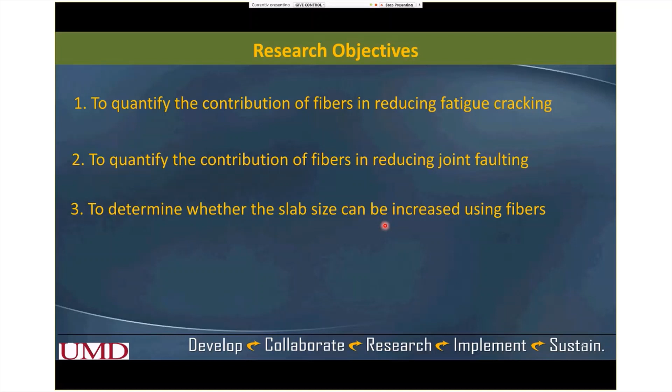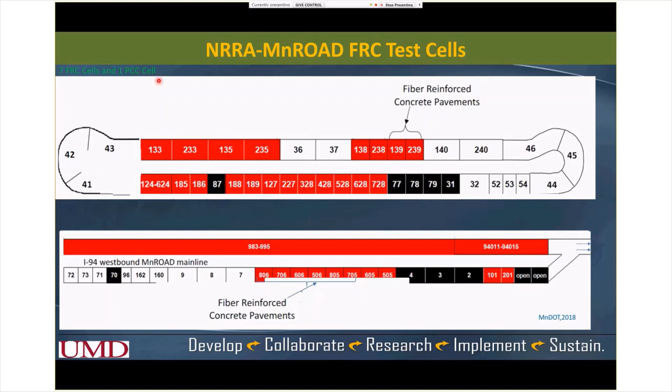These slides show the cell description. Out of the 8 cells, the first 6 cells are concrete pavement on gravel. Cells 506, 606, 706 and 806 were constructed on a relatively good, strong aggregate base layer, with slab sizes of 6 feet by 6 feet. We wanted to construct 5-inch thick cells, but cell 606 was unintentionally constructed with 6-inch concrete.

Cells 139 and 239 were ultra thin pavement, 3-inch and 4-inch thickness with 6 feet by 6 feet slabs. Cells 705 and 805 are thin unbonded overlays, 5-inch thick, and these two cells were constructed to see if we can increase slab size using fibers. Cell 705 has larger slab size - in the driving lane they were 14 feet by 12 feet, in the passing lane 12 feet by 12 feet and 13 feet by 12 feet. Cell 805 had similar length but the slabs were narrower, 6 to 8 feet.

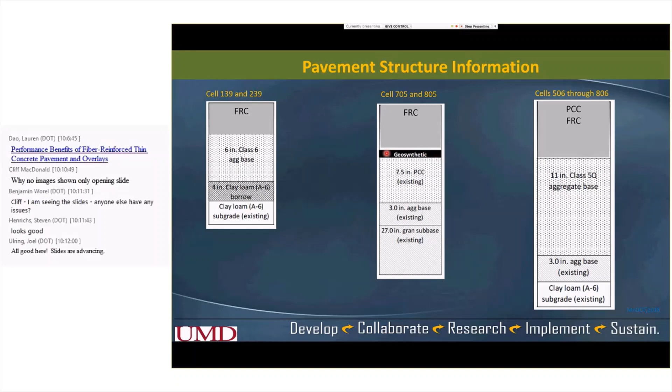This is the pavement structure information. Cells 139 and 239 were constructed on a slightly weaker base, using 6-inch class 6 aggregate base. Cells 705 and 805 were unbonded overlays, meaning a geosynthetic layer was used as a bond breaker. Below that there was 7.5-inch concrete on aggregate base. For cells 506 through 806 we varied the fiber doses - cell 506 was plain concrete and the others were fiber reinforced concrete. Those cells were constructed on a relatively thick or strong aggregate base with MnROAD class 5Q aggregate base.

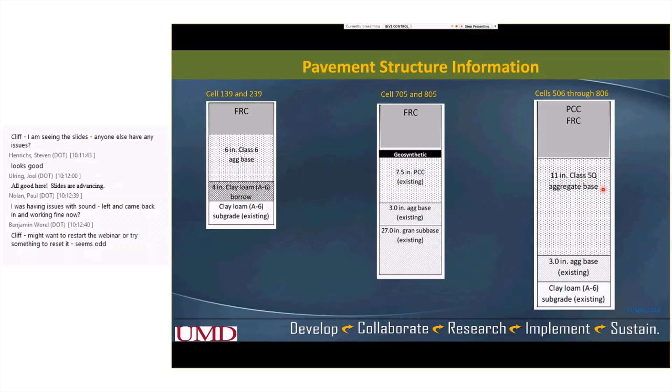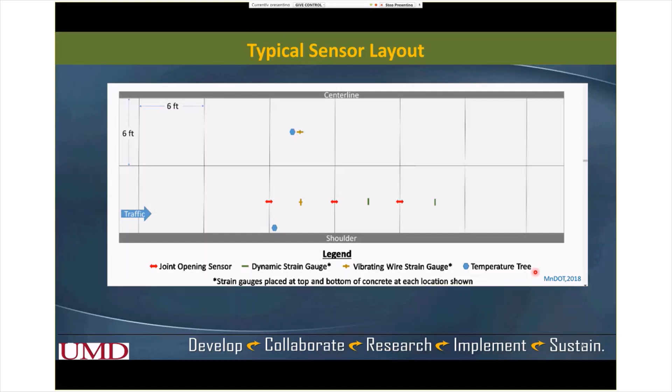Now with this information I will move to the distress data we have so far. First, fatigue cracking. The pavements were constructed in 2017 summer and fall. A distress survey was conducted in spring 2018, and in 2019 distress surveys were conducted in spring and in fall or early winter. For cells 139 and 239, by December the ESALs were around 114,000 for 139 and 85,000 for 239. The difference is because of their thickness. The other cells were having around 2.4 million ESALs by 2019, and now it should be more.

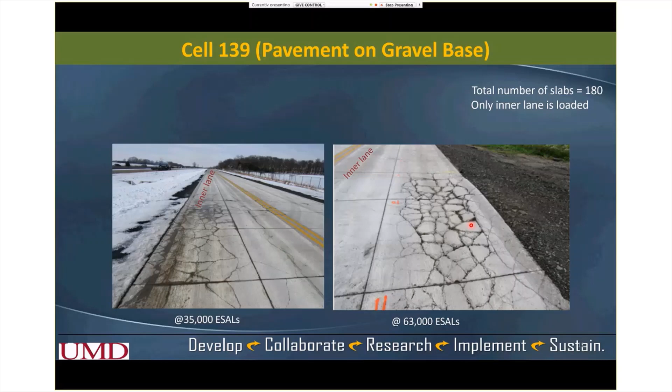So in September 2018, those slabs which were broken or shattered were replaced, 14 slabs. Then when the distress survey was conducted in December 2019, after 114,000 ESALs, it was found that more than 75% of the slabs in these cells are cracked.

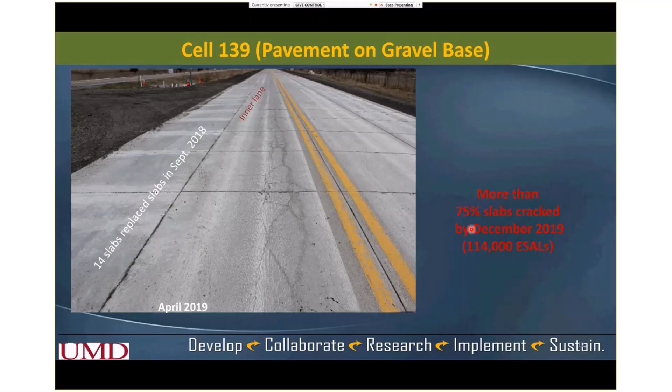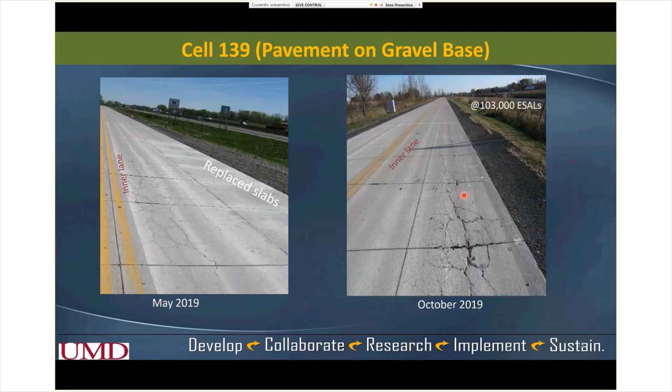Cell 239 had 176 slabs. Cell 139 has 180 slabs. Cell 239 was 4-inch thick and performed significantly better than cell 139, which was only 3-inch thick. These are some pictures where we saw corner cracks and some longitudinal cracks.

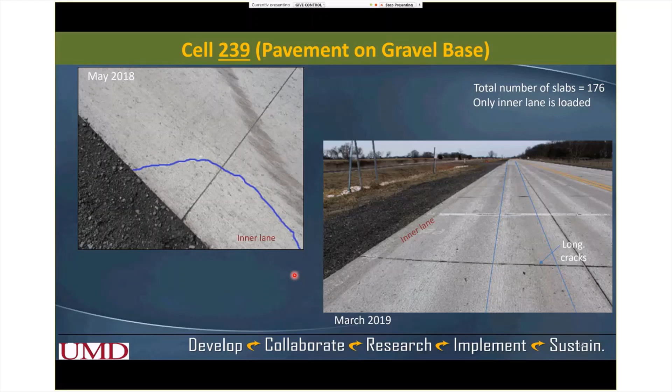These are two pictures, one taken in April 2019, another in October 2019. You can see some longitudinal cracks now, and from the district survey we found that 18% of the slabs have cracked.

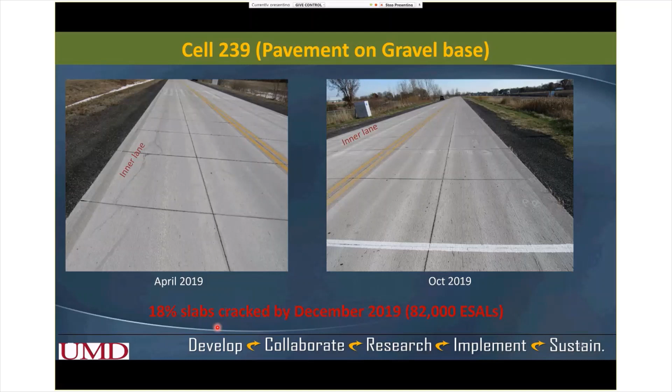Cell 506, which was the only cell that didn't have fiber, had around 96 slabs, all 6 feet by 6 feet. We saw only one crack in 2018, but we've seen some spalling on the transverse joints, as many as 15 locations found to have spalling like this.

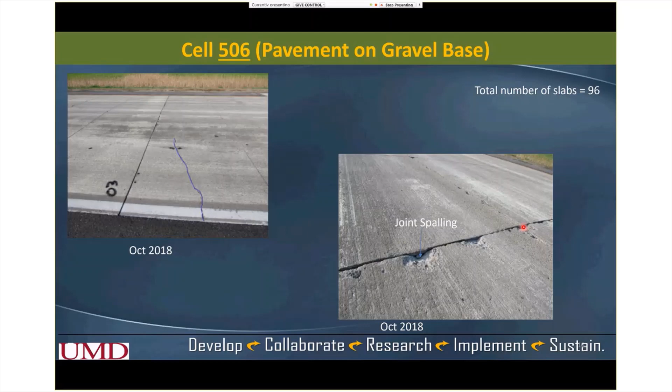By October 2019, there are a couple more cracks formed. Until the last survey was conducted, the data I have shows there are 3 cracks in this cell, no other cracks.

So 2% of slabs cracked by October 2019 after 2.4 million ESALs, which is great, because these 5-inch thick slabs were actually constructed for low volume roads, and only 2% cracked after 2.4 million ESALs, which is really great. But we'll have to keep in mind the base layer is really strong, 11 inches of aggregate base.

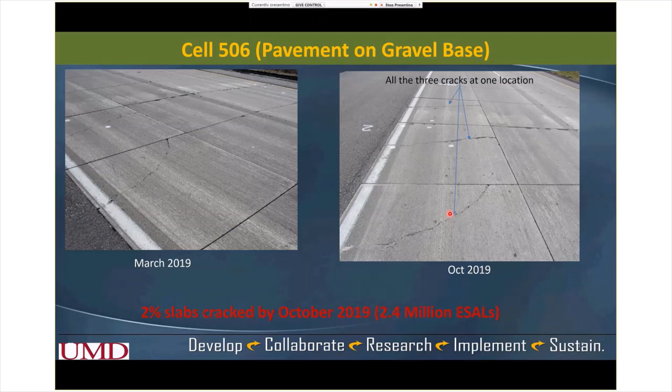Cell 606 only had one corner crack, but this corner crack is on the very first joint, which is kind of a transition here, marking the beginning of cell 606. So this crack probably is construction related. Tom and I also suggested this may not be a typical fatigue-related corner crack on the 6 feet by 6 feet panels of concrete pavement.

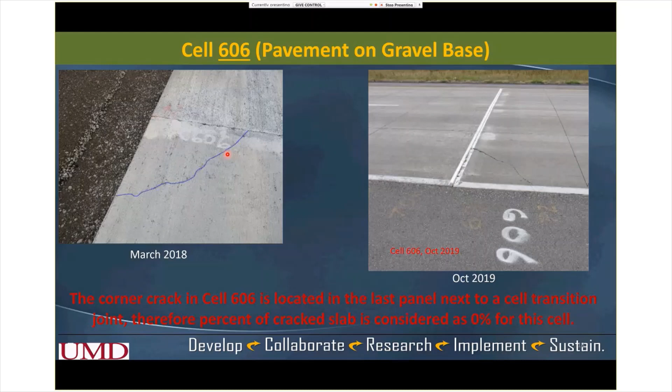So basically we do not have any crack, you can say, in 606. Cells 706 and 806 actually did not show any fatigue crack yet. In cell 806 we saw this kind of tiny little crack, but that propagated off from the joint opening sensor location, so these two cracks are also not fatigue related.

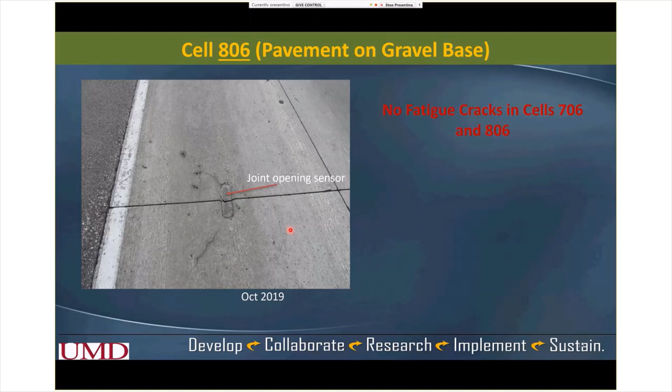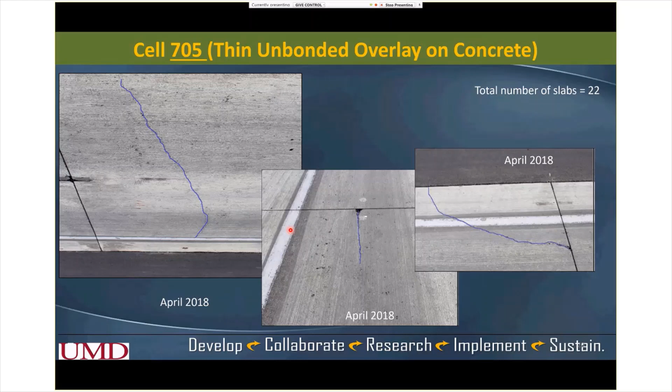Cells 705 and 805 are a thin concrete overlay, unbonded overlay. As I mentioned before, we varied the slab size, basically the width, while the length of the slab was 12 feet. In 705 we had wider slabs, like 12 feet, 13 feet. So we saw transverse cracks, longitudinal cracks, corner cracks, and those cracks, in number and length, continued increasing throughout its life.

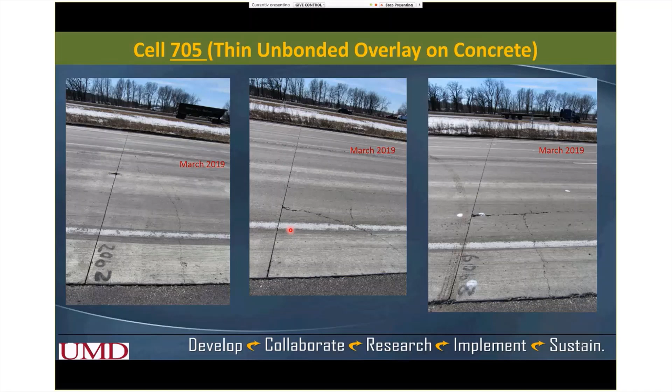So by the end of 2019, 55% of slabs cracked. In terms of fatigue crack, we probably crossed the design life. We're considering 20% slab crack as the end of life, and if we consider that, then we probably crossed it.

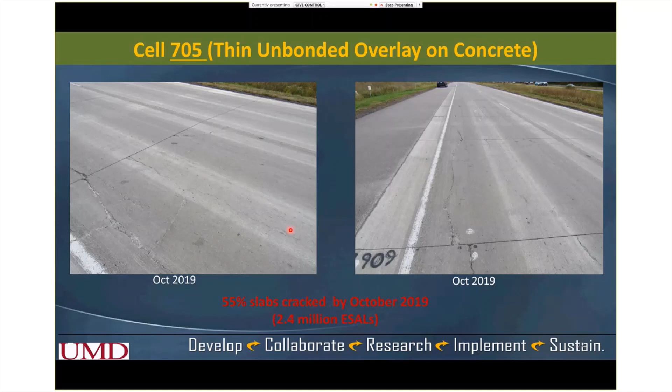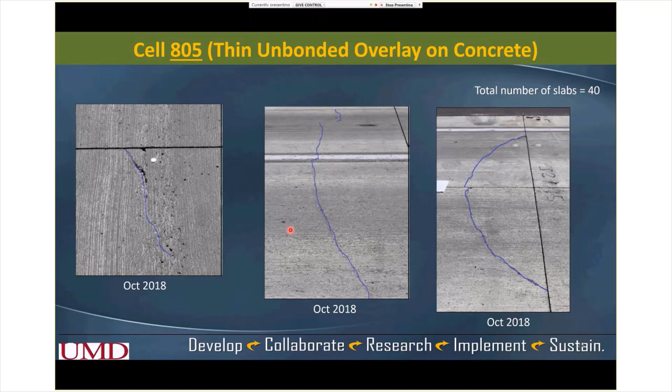Cell 805, which had narrower slabs, also showed transverse, longitudinal, and corner cracks, and those also increased, but these slabs did not crack as much as cell 705 had. So 28% of slabs cracked by October 2019 at 2.4 million ESALs.

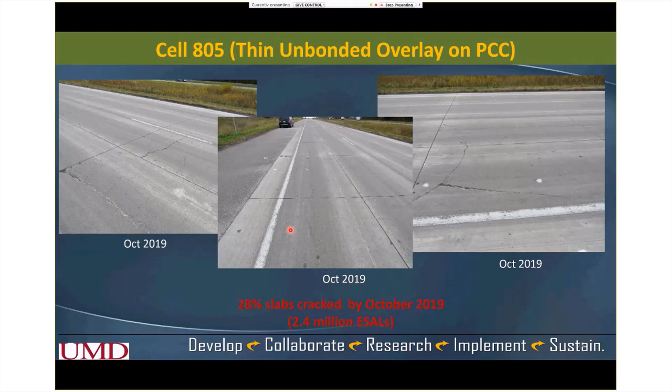Now this slide shows a comparison of the fatigue cracks and spalling. We can see cell 239, which was 4-inch thick with a little weak base, showed the maximum number of cracks.

We did not include cell 139 in this comparison, because 139 showed a different kind of failure, like slab shattering, and counting cracks in that cell was difficult. As we know, 75% of the slabs in that cell cracked, so we did not consider cell 139 in this comparison.

Now the comparison between 705 and 805 shows that 705, which had wider slabs, had more longitudinal cracks, and 805, which had narrower slabs, had more transverse cracks. But cell 705 had 55%, and cell 805 had 28% slab cracked by October 2019.

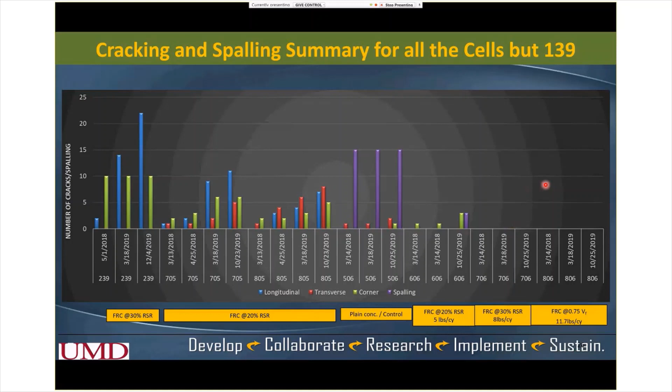This slide shows the percent slab crack versus ESALs for all 8 cells. If we consider 20% slab crack as the design life or fatigue failure criteria, cell 239 is pretty close, and the concrete overlays to unbonded overlays already crossed it, while 4 others constructed on thicker base are still performing good in terms of crack.

Here are some numbers I came up with: 4-inch thick with 8 pound per cubic yard fiber, but on a weak base, took about 100,000 ESALs to reach 20% slab crack. Then the 2 overlays: the wider slab reached 20% slab crack at 400,000 ESALs.

The narrower one reached it at 600,000 ESALs. So probably this particular research did not clearly show that we can increase the slab size. The slab size variation was 7 feet versus 12 or 13 feet width. This research says maybe we cannot double the width of the slabs using fibers. Maybe by 1, 2, or 3 feet, which may not be a big deal or may not be possible in construction. So we probably cannot double the size of the slab using fiber. That is probably what we are seeing from the results of the thin unbonded concrete overlay.

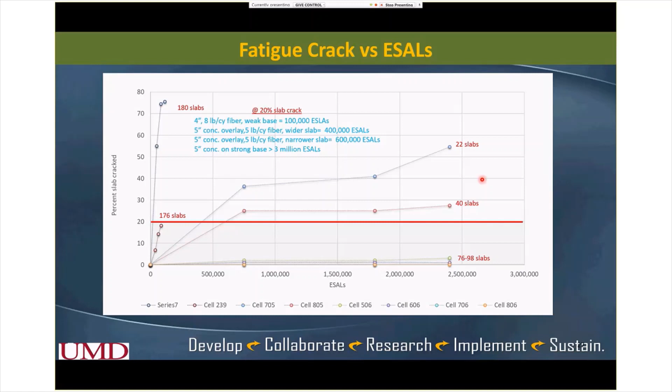Now, joint performance. Joint performance was studied. We took FWD data. FWD tests were periodically conducted, and faulting was also measured.

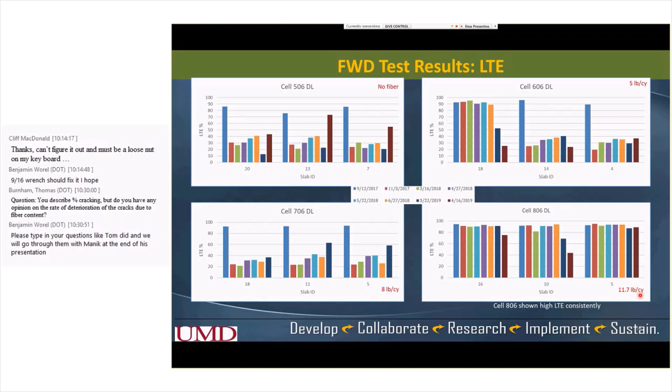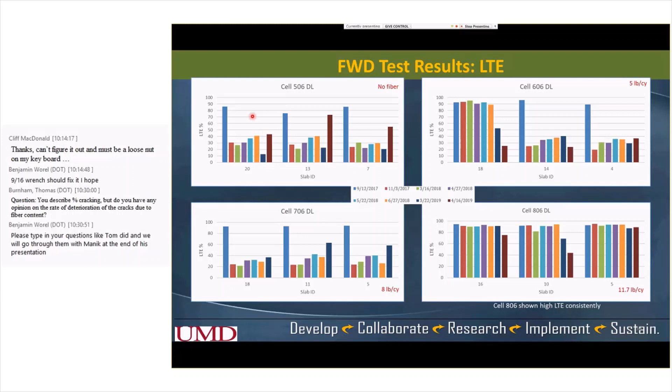Keep this in mind as we look at the faulting in these two cells. For cells 506 through 806, where we varied the fibers from 506 with no fiber to 806 with the highest fiber dose, you can see 506, 606 and 706 had load transfer values that decreased right away after construction. Right after construction we got more, but in subsequent measurements over 7 other dates, we didn't get a very high or even considerable amount of load transfer, well below the 60% or 70% we need.

Now 806, which had 11.7 pounds per cubic yard of fiber, the load transfer efficiency has remained continuously high. That means in these cells, fiber is really helping to keep the load transfer efficiency high.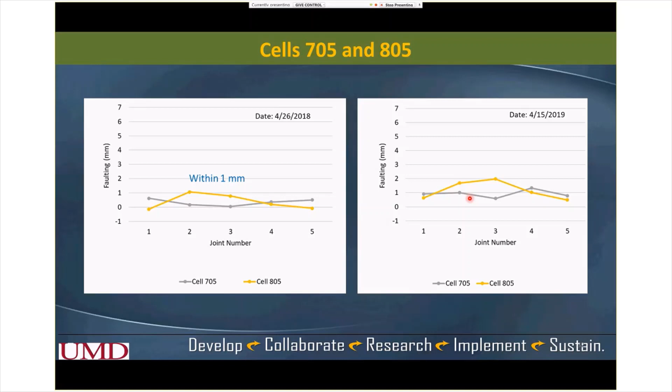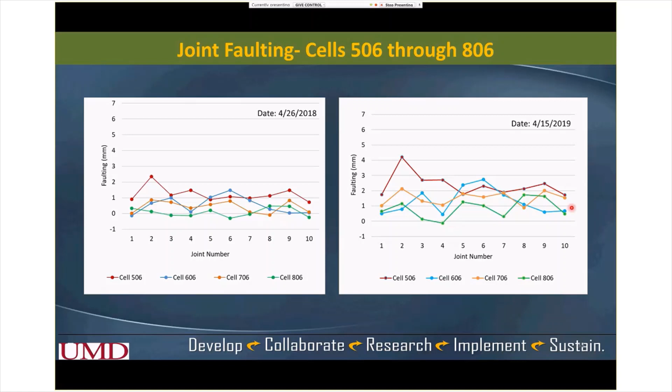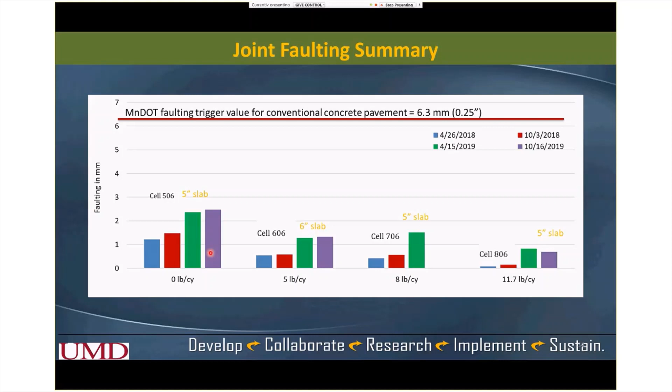Joint faulting for cells 506 through 806. Here we see a clear picture of how fiber is contributing. Let's look at the data we have for April 2019. You can see the plain concrete, shown in red, has a higher amount of faulting, and the green one, 806, which had the highest amount of fiber, had less faulting. We put all those average faulting results together in this plot, and as the fiber is increased, faulting is decreasing. Also the faulting quantity is increasing. The next graph will show us when faulting increases more.

Now this graph compares faulting versus ESALs. These two graphs here are basically for our cell 139 and 239 on the low volume road track, and these are the 4 cells, 506 through 806. We did not include the overlay because that's a completely different thing.

In this one, you can see the faulting measured during the spring was significantly higher. This was spring 2019, and this was spring 2018. We're seeing a good jump during the spring, possibly because of a weak base during that time, but this is the data. Compared to spring and fall, we see marginal increase and sometimes no increase at all. This data here is showing almost the same below. Actually, these particular faulting results were lower than this.

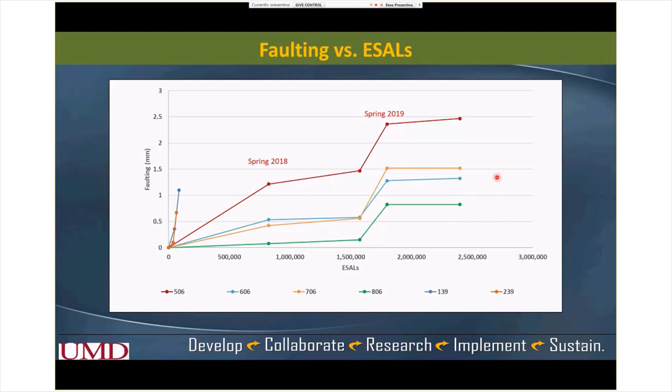So now in one of our tasks, we are using all the faulting results to develop faulting prediction models. We're also doing the same for fatigue cracking, but because the fatigue cracking data for 506 through 806 did not show any good cracks, we're still struggling with that due to lack of crack data for those cells where we varied the fiber.

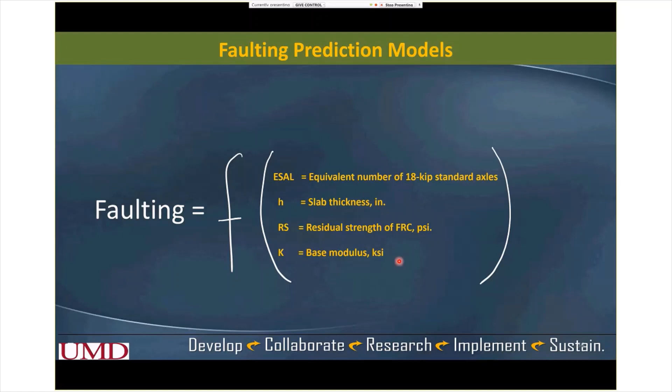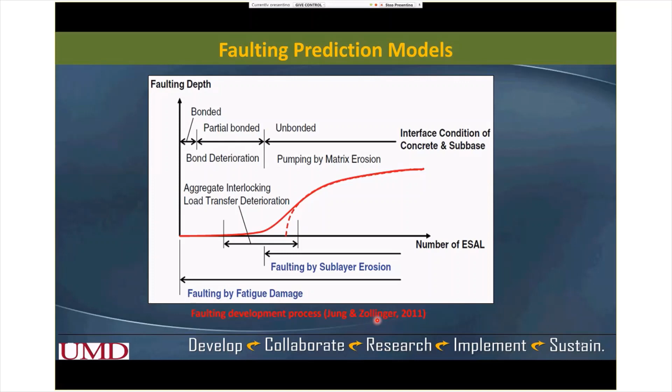But we analyzed the faulting data and tried to create some models. Here we try to relate the measured faulting with respect to ESALs, slab thickness, residual strength, and base modulus. The base modulus we didn't have test data for, but we found other research conducted on MnROAD where they reported resilient modulus or other parameters. So we used those to get K, and we also got K with respect to different seasons. This is a kind of typical faulting model, not exactly for concrete overlay or thin concrete pavement on gravel base, but for conventional concrete pavements. This model is by Dr. Zollinger and his group. As you can see, initially the faulting remains low, and then when layers get unbonded, pumping or erosion takes place, and the faulting starts increasing. So we tried to analyze our data in that kind of pattern.

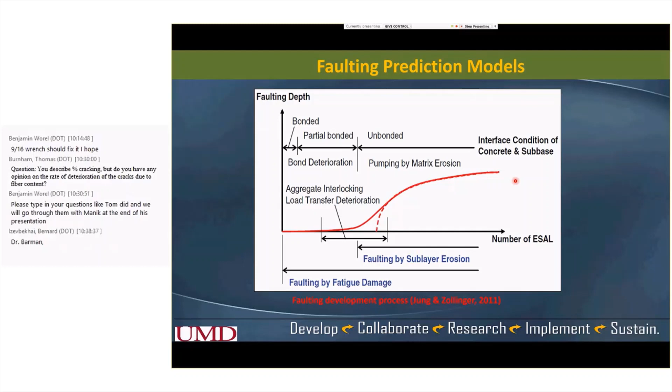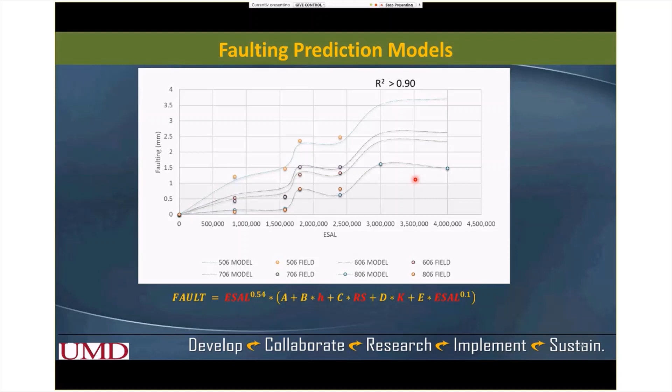As I mentioned, we collected a lot of sensor data. We had a lot of sensors installed, and then we collected all that data. In these presentations I'm not going to cover it extensively, since we are still doing a lot of analysis on this data. So these few slides just show basically key findings.

We collected temperature data at different depths of the pavement, and we collected data throughout the season. These two graphs on the left show how temperature varies with respect to the season, and then we calculated the temperature gradient. As an example, the temperature gradient at three times, which we calculated here - X, Y, and Z - are basically three times: high temperature, low temperature, and intermediate temperature.

In all three times, what we observed is that because the thickness of the slabs here is 3 to 5 or 6 inches, not like 12 inches, the gradient is relatively linear. You can see the gradient is relatively linear. For one particular slab, I'm not sure why, cell 239's sensor did not show this, but if we take out those particular results, it's again probably linear.

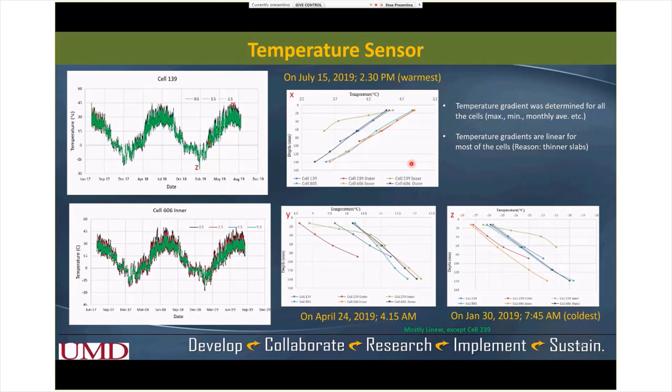So we calculated the temperature gradient and then plotted their frequency - temperature gradient versus frequency. This data helps us understand what the key temperature gradient would be, and we also compared negative and positive temperature gradients. We saw the pavement experiences negative temperature gradient 60% of the time, meaning the top remains cold and the bottom is hotter.

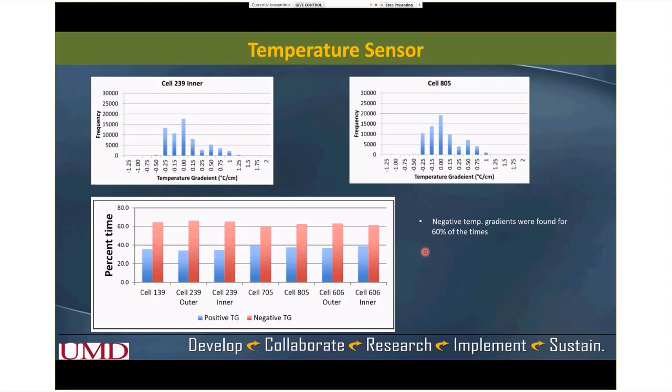That kind of situation. In Minnesota, we collected strain using vibrating wire environmental strain sensors. This green graph is basically the temperature, and all the other graphs are environmental strains collected by the different sensors. You can see the variation with respect to temperature and season. I'm not going into more detail.

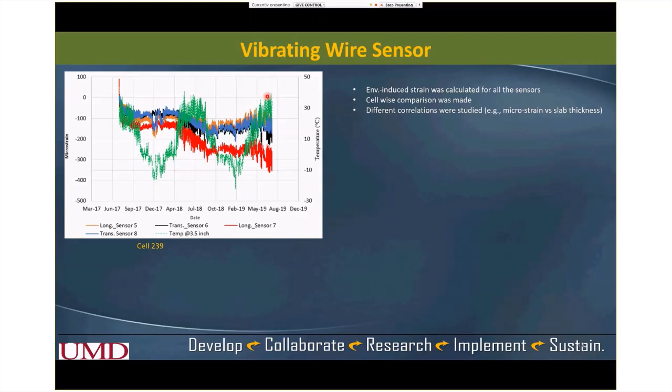We also have the strain caused by wheel load. So we combined the environmental induced strain and the load induced strain, and in this slide you can see we compared them. As anticipated, cell 139 has more strain than all the other cells, and that's probably the reason why we've seen more cracks there.

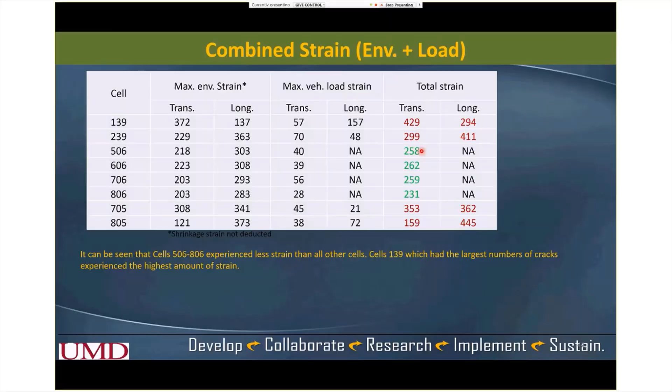Now these four cells, which are cells 506 through 806, you can see the strain in these cells is relatively low - around 40% of their modulus of rupture. So that's probably another reason why they are not cracking.

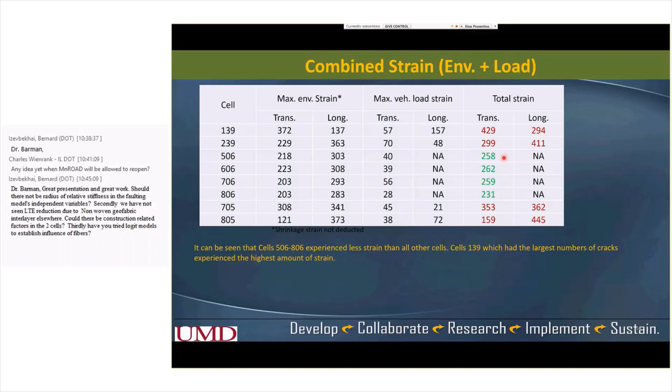We also collected joint movement data. Again, I'm not going into more detail, but you can see some sensors are very active, reflecting the slab movement, while some sensors remain really dormant, which probably means the crack didn't develop there. So this is the kind of data we have.

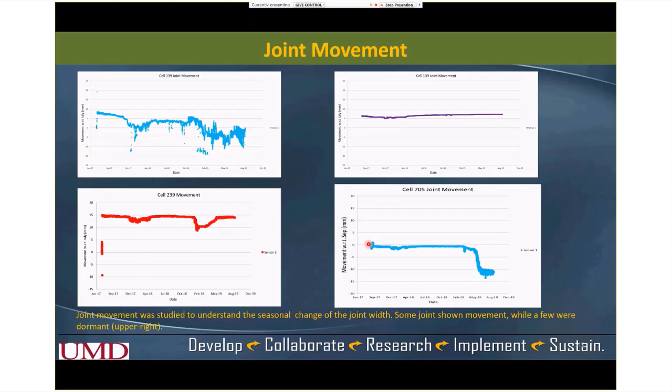We also conducted laboratory investigations in parallel, and we are also doing finite element modeling. The laboratory investigation is completed, and we will report on it in the final report of this project. This is a little bit of additional work that was not in the proposal, but one of our graduate students worked on it, so we'll include that in the final report too.

What we tried to do - as we know, the synthetic fiber used in pavement has been noted by a lot of researchers to be prone to creep. So in this experiment, what we did is induce crack creep. What is crack creep? We actually cracked this beam.

We induced a crack - the cracks were not that wide initially, so this picture was chosen just to show the crack. We used flexural load to crack this beam 18 hours after construction.

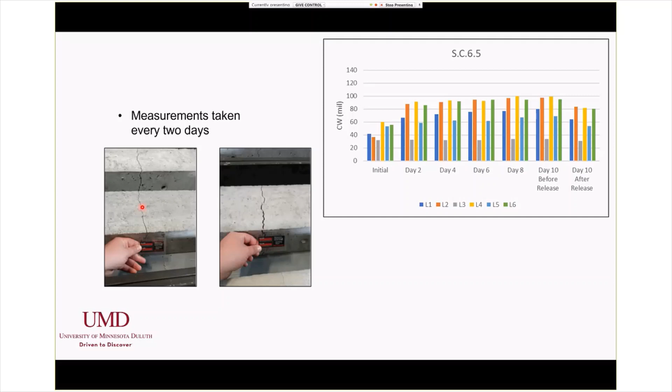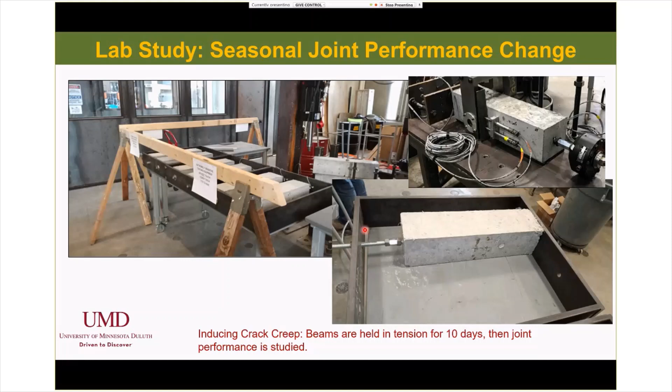You can see we developed this facility where we could apply tension on 6 beams together, for as much time as you want. For this particular research, we applied tension for 10 days, and this graph shows the difference.

For example, we tested 6 beams for one particular type of concrete. In this one, whatever the initial crack width was, we had a 40 mil crack width - 1 mil being 1/1000 of an inch. We had tension throughout this period, and you can see the crack width kept increasing. Then we released the tension, but the crack did not go back to its initial 40 mils. So we don't have load here, and we also don't have load here. So what does that mean?

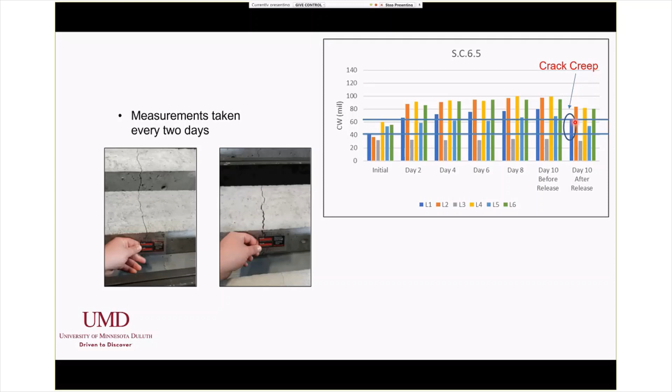If we expand the crack, fiber gets plastic elongation, or some fiber can pull out. So plastic elongation of the fiber or the fiber pull out, these two create this crack creep. So now this crack creep influences the load transfer.

This is again a very simplified graph. We have scattered data, so my student just plotted a trend line. For the not-creeped beams, which were not creeped, you can see the load transfer efficiency was 20 to 30% or even higher than those beams which were creeped. So this is another thing we probably need to look at.

This particular finding tells us that if fibers contribute to joint performance or load transfer, probably in the first winter when the crack width is wide open, fiber will contribute at that time. Now the contribution in the first winter or first spring will not be the same after, let's say, the fifth year, because the fibers will repeatedly be creeped. So when we want to incorporate fiber properties in the mechanistic design of concrete overlay or thin concrete pavement, we probably need to consider this kind of creep of the fiber, just like in asphalt we consider aging of the asphalt. So this aging of the fibers should also be considered in the design.

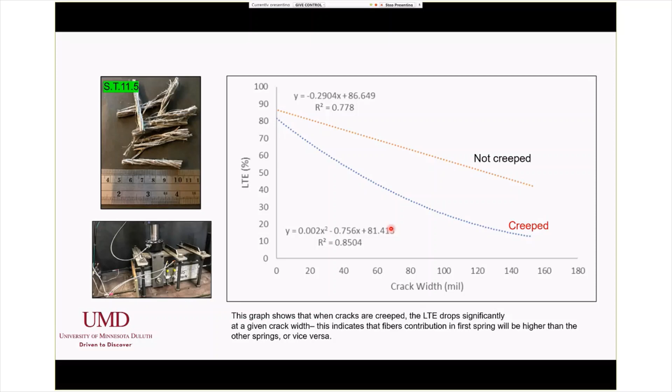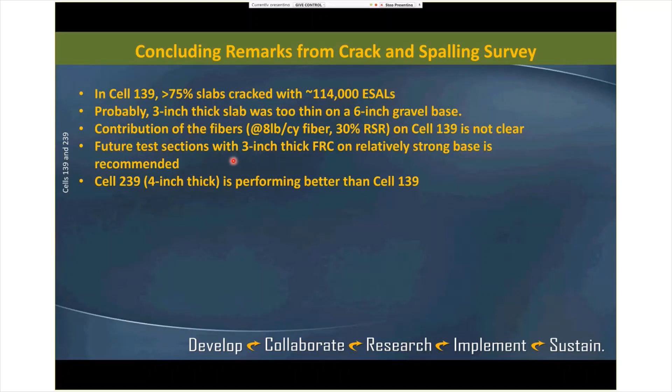So in conclusion, regarding the crack and spalling, in cell 139, as we saw, 75% of the slab cracked. Probably the 3-inch thick slab was too thin on a 6-inch gravel base. So the structure was actually thin, so we probably cannot comment whether fiber was really doing anything in cell 139 — the structure was probably insufficient. So maybe next time we should either construct thicker cells, or construct the 3-inch layer on a relatively strong base, then we can compare.

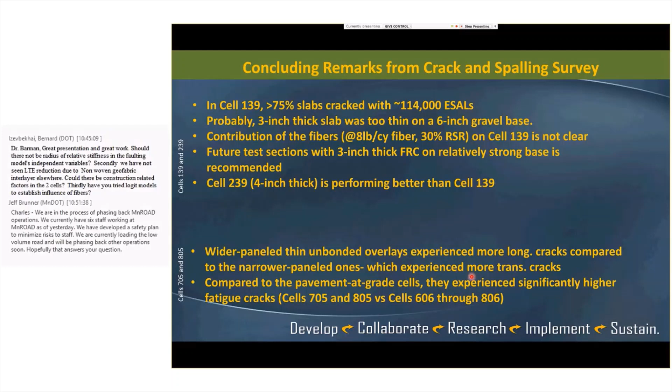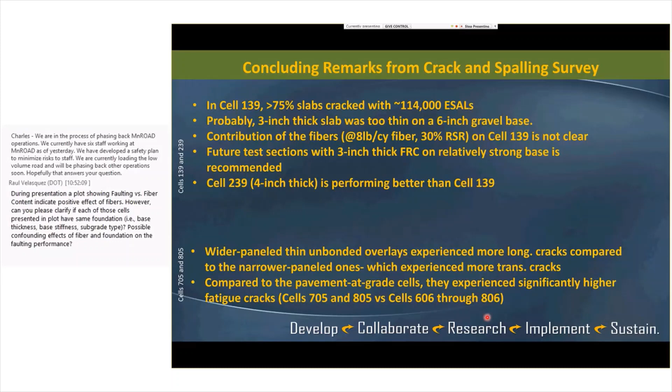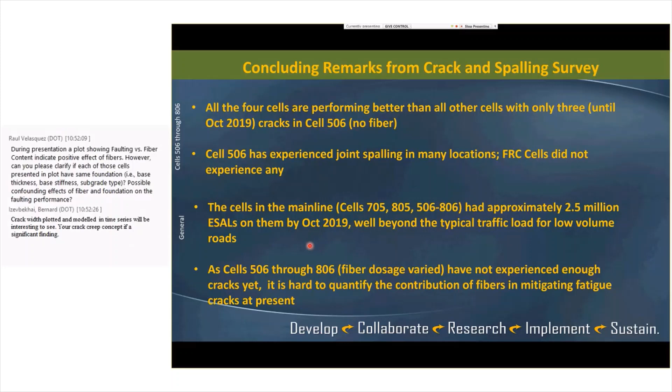606 through 806, which were constructed on the gravel base, or relatively strong base, so all four cells like 506 through 806 are performing well. Joint spalling was observed on cell 506. Let me go to the next slide since we don't have too much time. Now on the faulting, as you saw, cells 139 and 239, even though damaged by fatigue, had less faulting.

And then fiber contribution was observed in 506 through 806. Cells 606, 706, 806 showed lower faulting than cell 506 with no fiber. Cell 706 and 806, even though they showed really low LTE, had less faulting, probably because of the geotextile.

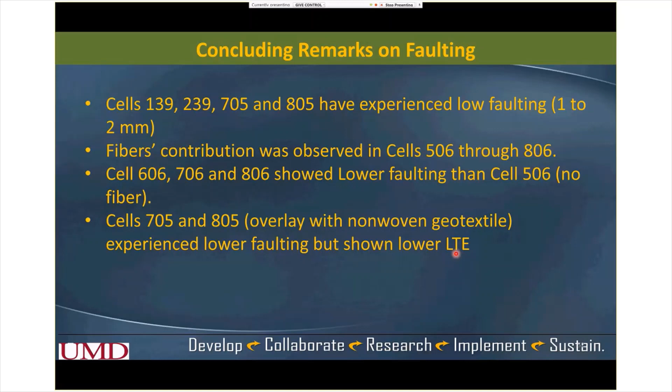With respect to FWD, fiber contribution is observed in cells 506 through 806. Cell 806 showed higher LTE, and that was consistent. LTE for cell 239 was also good, and cells 705 and 805 had low LTE, but they were doing good in terms of the faulting. So with that, I am done with my presentation, and I'll be glad to take any questions.

All right, Manik, thank you for your presentation. This is Ben Worel. I noticed 4 questions. One had to do with the operations of MnROAD, and right now we're kind of back working.

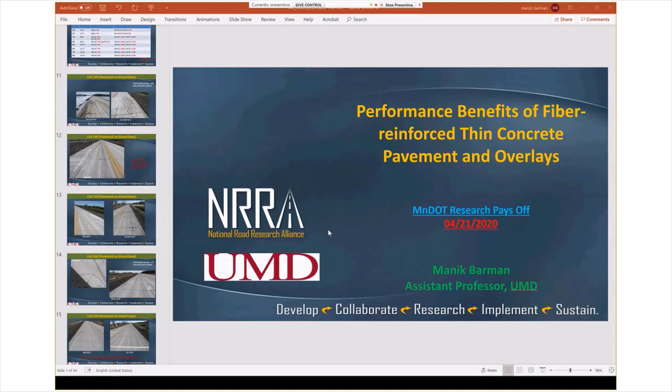We have our truck running. Jeff Brunner kind of answered your question, I think, Charles, but we basically lost 3 weeks of time where we were at home. We have people working safely out at MnROAD, keeping their safe distances. But again, our sensor data, environmental data, there was no effect from COVID-19 on that. The dynamic data, we've actually collected the data for our early spring and late spring testing. So really, we've been keeping up on that. The truck is running now, again, like I said, we've collected our early and late spring monitoring. So in some ways we did pretty well with this so far, and hopefully everyone's health around the country stays the same. But we're kind of back to collecting data, just not collecting data holding hands right now.

Manik, there's a couple of questions. Tom Burnham started it out, and I don't know if you want to read it, but I can read it real quick. Yeah, I'm just looking at Tom's question. If you allow me, go ahead. I can read it — we only have 5 minutes, so keep it quick if you can. Tom's question is basically, do you have any opinion on the rate of deterioration of the cracks due to fiber content?

I think right now no, because cells 506 through 806, where we varied the fibers, that did not give us many cracks. Only 506 had 3 cracks, which did not have any fiber. Other cells 606, 706, 806, where we had 3 different doses of fiber, we did not see any cracks. So I probably cannot comment on that one right now.